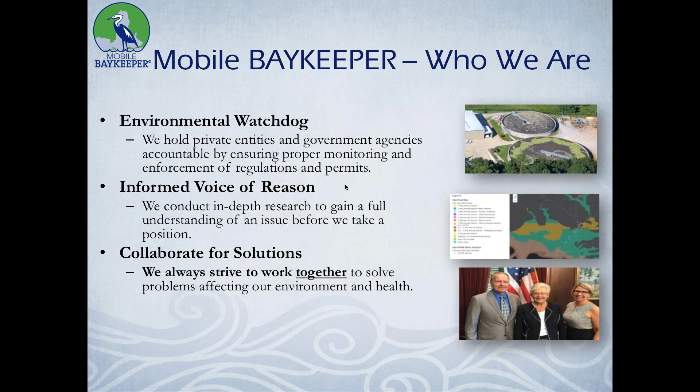We work really hard to be an informed voice of reason. So before we take a stance on an issue, before we point a finger from this environmental watchdog stance, we're doing in-depth research to get a full understanding of the issue. And then we always try to collaborate for solutions. So that means that our first step is not to file a lawsuit. In fact, that's our very last step. In case there's no other recourse we can take, we always want to find a way to work together with a group, an organization, business, individual to fix a problem if we can.

And we do three major things here. We do a lot of education and engagement. That's the fun part of the work. We get to raise awareness about key issues and educate adults and students, and go out and do litter cleanups, apple snail roundups. We have a program called SWAMP, which is a strategic watershed awareness and monitoring program. That's kind of our number one in terms of reach educational program. We work with a bunch of high schools around the area, Vigor, LeFlore, Citronelle, Murphy. We've previously worked with Fairhope, with Alma Bryant, and some of those are newer. So if you guys are grads from one of those schools, you're like, well, I didn't get to do that. We're sorry, but maybe if you have some younger siblings, they'll get an opportunity.

We want people to have jobs, but we want it done in a way that also protects the Gulf Coast and doesn't sacrifice our future and our natural resources for short-term growth. We want to see it done responsibly. So that's kind of what we do. I'm going to talk through a couple slides about responsible, or in this case, irresponsible growth.

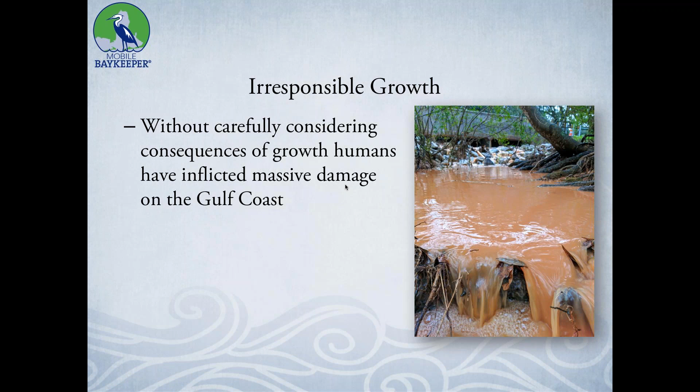Without thinking about what the consequences were over a long period of time, we've inflicted a lot of damage on the Gulf Coast. In the US, over the last several hundred years, we've lost 104 million acres of wetlands, and that's like 60 acres an hour for 200 years, which blew my mind when I figured that out. Of course, the majority of that was early on, a whole lot less since the 1970s and the Clean Water Act, but it still tells you this vast amount of natural resources that have been sacrificed to let our communities grow.

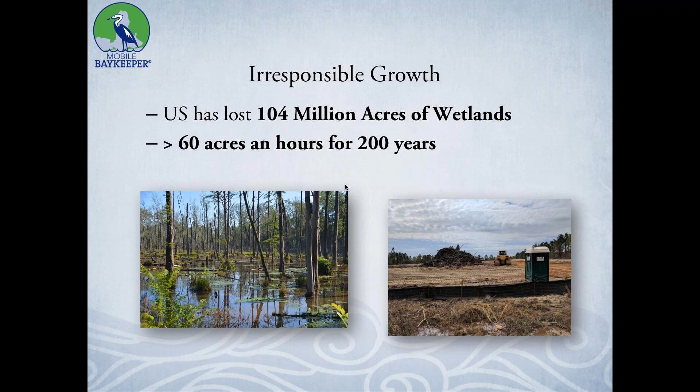And down here, I've got a picture. This is actually locally sourced. If you look one way across this road, the picture on the left is what you see. Then they got this wetland fill permit to build this small industrial facility on the south side of the road. If you just turn around 180 degrees, right behind you is the picture on the right-hand side of the screen. It used to look basically exactly like this wetland, and now it's been filled in. Now it's a nice flat spot right for development.

And I'll talk a little bit about why wetlands are important too. Zooming in, and this is kind of the same deal. Since 1955, the Mobile Bay area has lost 50,000 acres of wetlands. That's about 12 acres a day. And again, the majority of that was early on, but it still tells you how much natural resource has been lost.

And y'all probably know a lot of this, but wetlands are vitally important for our environment. They protect against flooding and storm surge. When there's pollution from different things like sewage spills or stormwater runoff from cars with oil, all kinds of things, those wetlands act like natural kidneys. They filter out the pollution, they absorb it into those soils, and bacteria, microorganisms, and plants are able to take it up and keep it from just going straight out into the environment. And it's released more slowly in a way that animals and fish and all that can handle a lot better than if it just runs straight off.

So wetlands are really important for a whole lot of reasons, both economic, like we don't want our neighborhoods and businesses to flood or get devastated by storm surge, and those wetlands can hold that water, but also environmental.

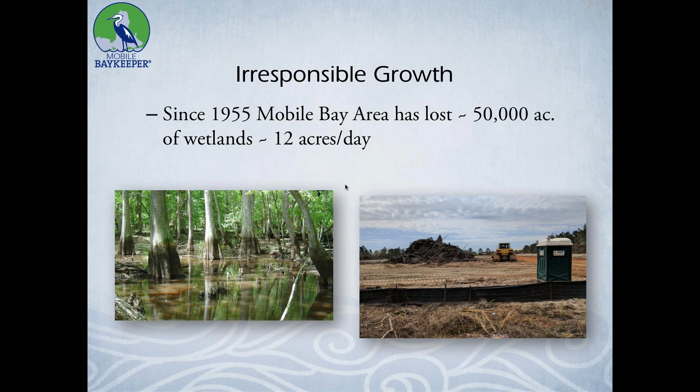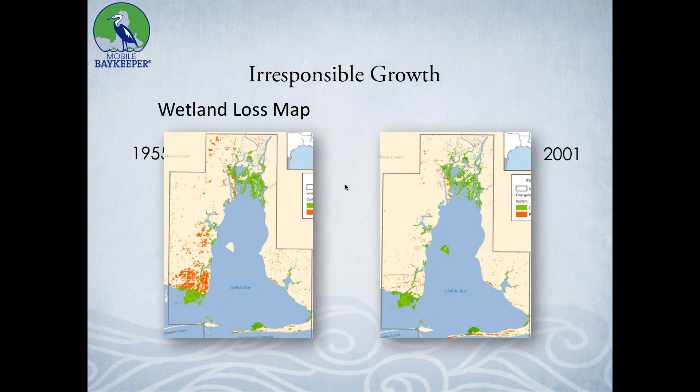But you can just see, I think the green is emergent wetlands, which means wetlands that are a little bit more coming out of the water, a little bit more like down on the marshes and the bays and the rivers. And then the red, I think, is forested wetlands. You can see the red especially taking a huge hit. You can just see all around, Cade and Grand Bay, Theodore, and around Mobile, just tons of forested wetlands being eaten up for strip malls and Dollar Generals and houses and everything else.

You look at the potential for some of these Baldwin County cities to be the fastest growing city over the next 20 plus years, and move to being the fourth largest county in the state. So there's this huge, almost 120,000 person increase that they're expecting in 20 years in Baldwin County. And you see this, if you're over here, or if you come over here much, you see this growth going on just unabated.

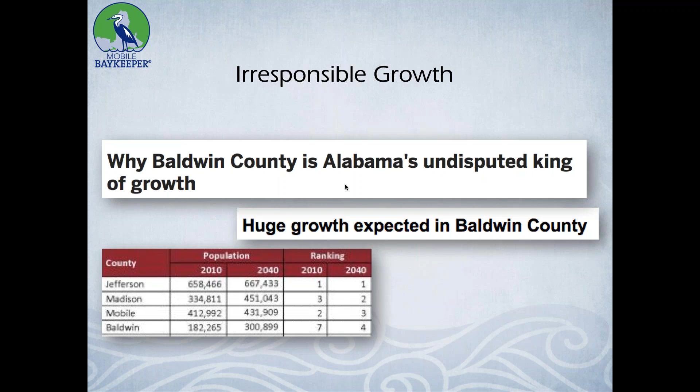It's like a Wild West. And again, we're not anti-growth, it's a matter of doing it right. This is the important piece. But usually when there's things going on really, really fast, there's a little bit of sloppy work done.

So what is stormwater? Stormwater runoff is all the rainwater that flows off the ground into receiving waters, lakes, streams, creeks, bays, wetlands. A lot of that water goes down into the soil, especially where you've got grass or wetlands, the rainwater can infiltrate. But where you have impervious surfaces, like driveways, roofs, parking lots, sidewalks, and streets, that water can't soak in, it's forced straight off into the nearest storm drain. Storm drains don't go to the wastewater treatment plant, they go straight to the closest stream, river, bay, or lake through a concrete pipe. Wastewater is treated, stormwater is not cleaned.

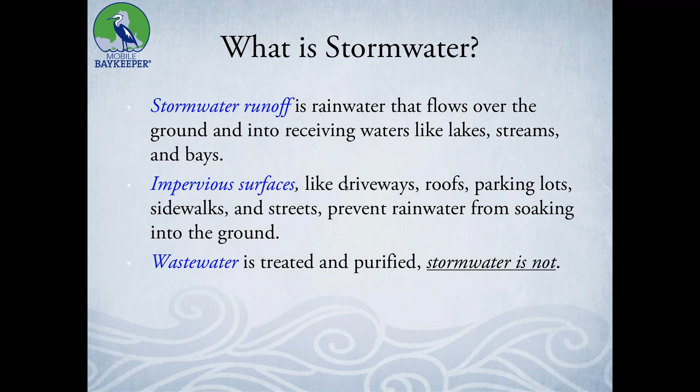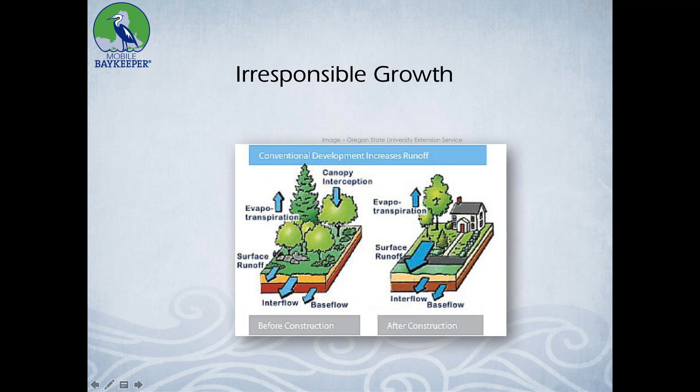So you can see this before and after. You've got a natural area, you get some rainwater, it goes down into the ground, a little bit might flow off into the closest lake and stream. It seeps from the ground and slowly works its way over into the rivers and creeks. You put down a house, roadway, and sidewalk, and a fair amount of it doesn't go down into the ground anymore. See this bigger arrow here for surface runoff, indicating a whole lot more water is rushing straight off, carrying whatever pollutants it might be carrying, including mud, as well as a lot of heat, which is a whole big deal about temperature pollution. And this is fairly mild compared to what you might see in some really urbanized areas in terms of impervious surface.

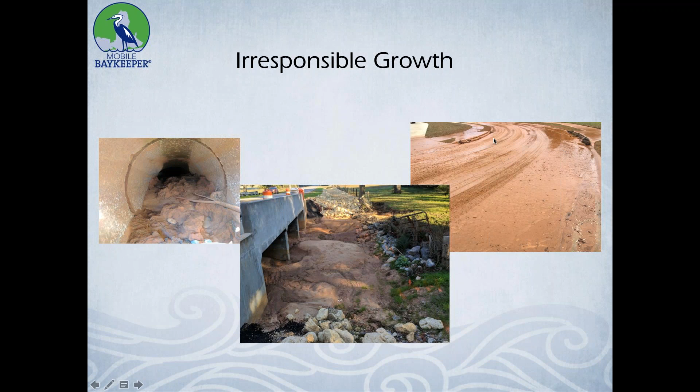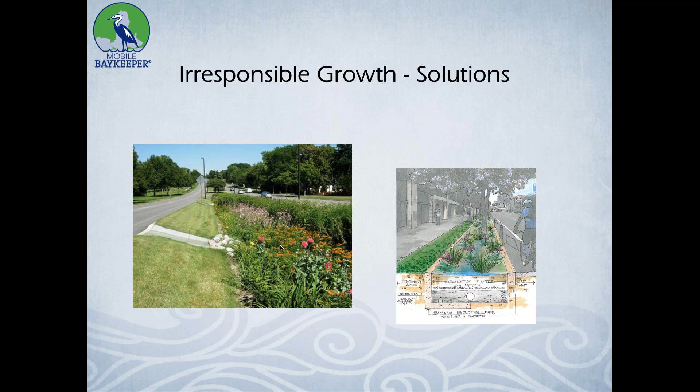So what are some of the solutions? I had a professor at Auburn, Eve Brantley, who would often say vegetation is the answer. Vegetation is often the best way to solve a lot of these problems. You can see here these planters where they've got the stormwater, rather than funneling it straight into a pipe and out into a creek, which is an engineering solution that works to prevent flooding to an extent. These planters have engineered beds under them, so they drain properly. They put gravel down and even have an under drain, a pipe that makes sure the water moves during a catastrophic amount of rain. Instead of the water going straight into the river carrying heat, oil from the roadway, and everything else, it now filters into this nice bed, which is also beautiful to look at. Your community is more aesthetically pleasing, has less potential for pollution ruining your favorite fishing spot, and it also doesn't flood. So there are some great solutions.

All right, so that was a little bit of an intro as to why this is important, but now let's talk a little bit about this Muddy Water Watch program.

This is basically like a volunteer training we do that gets people educated to know when it's a construction stormwater issue specifically. There's a ton of stormwater issues. They range from urban stormwater, which might be things that run off from parking lots and houses, to plain erosion from high velocity water, but construction stormwater specifically relates to mud and a few other things flowing off construction sites when they don't follow the Clean Water Act.

So we train people to know when that's an issue, how to report it, how to deal with it. I've got a bunch of slides here, so I'm going to fast forward through a few of them and get a little in depth. I don't want to kill y'all and put y'all to sleep, so if you see one that's really interesting and I say that one's not too important, you can yell out and I'll make sure I actually talk about it.

The state agency that deals with this, ADEM, the Department of Environmental Management in Alabama, doesn't have a ton of resources to deal with it. They've got pretty much one person in Mobile County and one person in Baldwin County that does these construction stormwater inspections. They can mobilize a few more people sometimes, but that's typically how it works.

The cities themselves usually have a person on their staff that kind of does this. Sometimes that person in the smaller cities does like 8 different things - they run the garbage truck, and they're also the mayor and whatever else. But in the bigger cities there's usually somebody specifically to do this - Fairhope and Daphne have somebody, Mobile has several somebodies that deal with this. So there's job opportunities there as well.

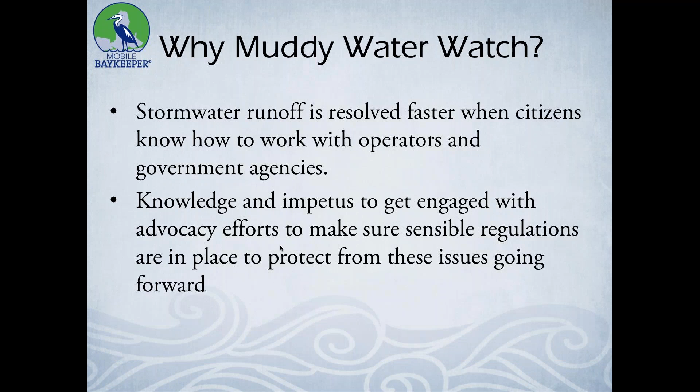To be clear, I have friends that are developers. I know good developers, but some really have a hard time following the law. They come through, they clear cut, they build some condos, and they pocket the profit without doing what they need to do. So that's not everybody - again, that's not everybody, but there are some, and we've seen it prevalently in some cases, and we've worked really hard to get solutions. I'll tell you about a few solutions.

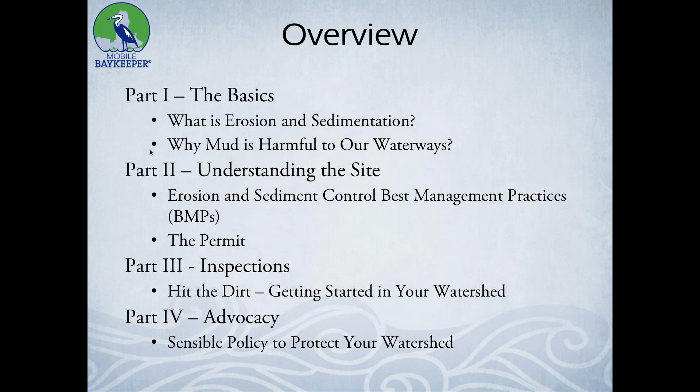Let's talk about some basics. We'll talk about what a construction site looks like, how to do an inspection, how to do advocacy. Why is clean water important? I think you guys know by now - it's everything, right? From being able to drink clean water to being able to play, fish, economy. Clean water impacts pretty much every part of your life.

If you talk to people that have been around Mobile Bay for a long time, they'll tell you about all the grass beds and oysters there used to be, and clear water. But if you go play in the bay today, you won't see many grass beds, you won't see many oysters, and depending on the day, you usually won't see much in the way of clear water. A big chunk of that is muddy water.

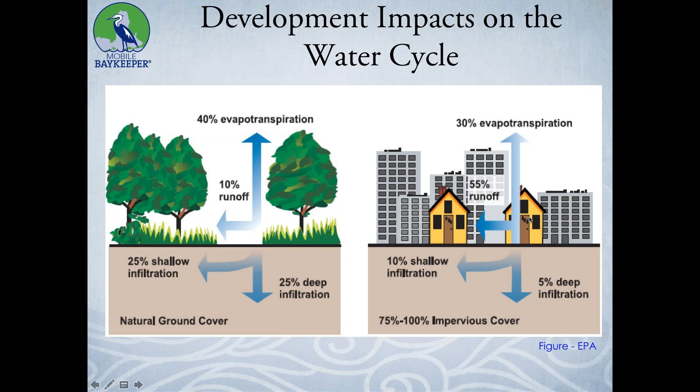So why do we really worry about construction sites? Well, they take off the vegetation, there's a bunch of soil exposed, the flow is concentrated, meaning it's all funneled to a certain spot, and there's increased impervious surface, like roadways.

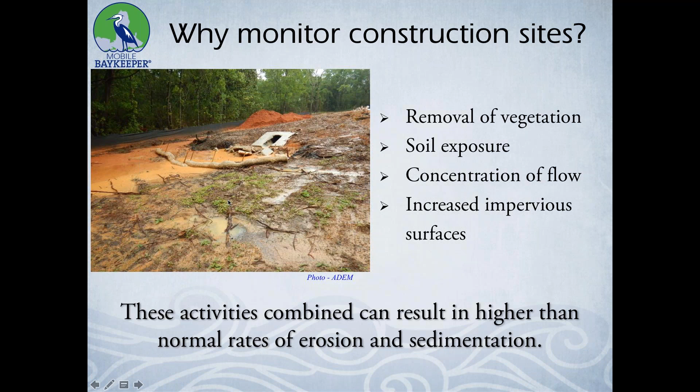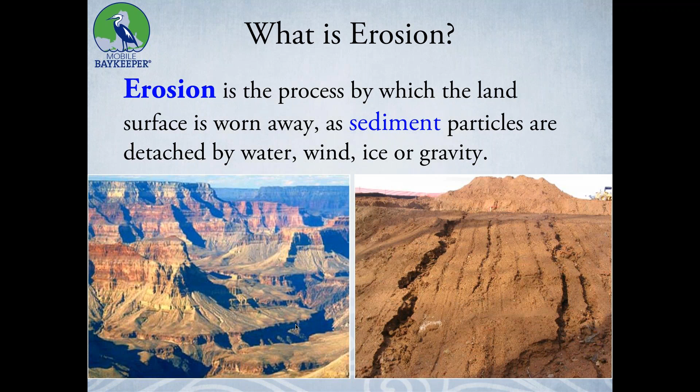Everybody know what erosion is? I won't beat you over the head with it. Land is worn away and sediment particles are detached, right? That's erosion. There's 5 types, which I'm not going to go into in depth because it doesn't make a lot of difference for what we're concerned about, except for one thing: all the types except one are pretty much human caused.

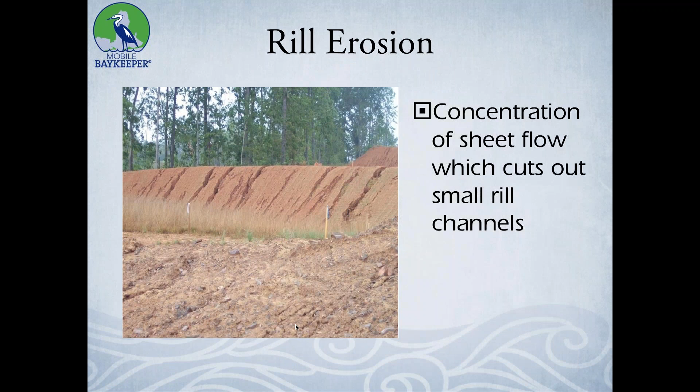This is real erosion, this is how it starts - rill erosion, although it sounds good if we call it real erosion. Gully: when the rills get bigger, they make these established channels called gullies. This is the one that is not usually human caused. We can have stream bank erosion that can be caused just naturally. So there should be some mud in the bay and in the creeks and rivers naturally, but it shouldn't be the amount that we see after these construction sites come through and pillage.

This can be made worse if we throw that stormwater in there full speed coming from the city, because it scours and erodes those stream banks. So we can see that made worse.

If y'all want to see some amazing restoration, if y'all hadn't already been there - obviously tonight is a little bit of a tough time - but those streams in Daphne that they've done, especially the one just south of I-10, they've done some really cool work. Y'all seen those? I see some fist pumping. Y'all get to go, they've gotten to restore some of those sites with the NEP. Well, kudos to y'all, thank you, because those are some impressive sites. I love the team that's worked on that, and y'all are part of that team, so y'all got my love here.

Pretty cool stuff. This is in Fairhope, near Fly Creek.

The one on the right is actually in Mobile County, now that I think back.

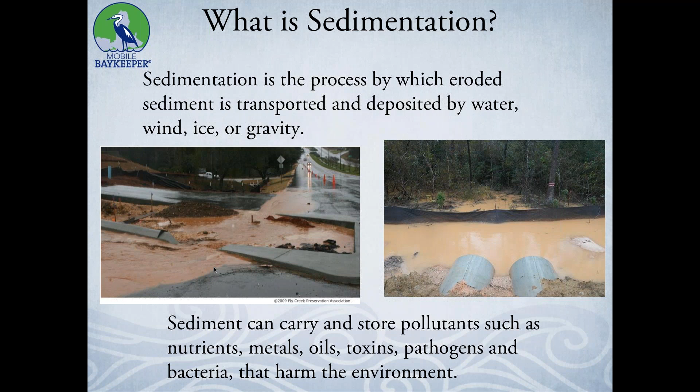Sedimentation is when that mud is actually deposited. So erosion means rip it off the ground, and sedimentation means it's starting to go back into our creeks and streams. And it can carry a whole bunch of other stuff, not just mud. It can carry nutrients, lead to dead zones, metals, oils, bacteria, all kind of bad stuff.

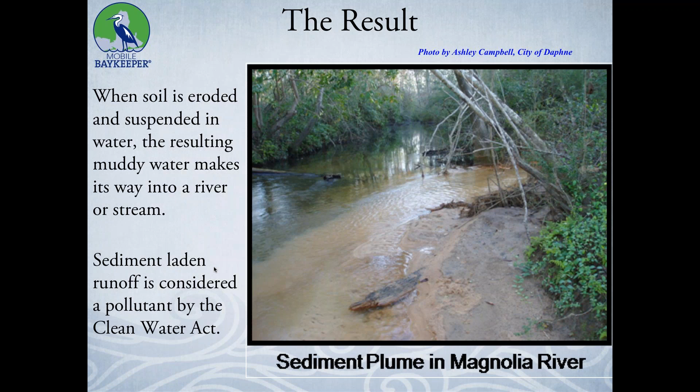You can see this nice plume in the Magnolia River that Ashley Campbell took a photo of. Y'all probably got to meet her if you did some stuff up in Daphne. She's cool.

And just to talk about the impact, because this is the key piece here. It's like, oh, it's just mud, especially in South Alabama, people are like, it's just mud, who cares? I sprayed the water hose on the sand pit as a kid, it's just mud.

Well, again, it blocks sunlight from aquatic plants. Small amounts can irritate fish. Large amounts can actually clog their gills and cause them to suffocate, or also cause them not to be able to breed, which means if you like to fish, it's a big deal, because it can actually cause the fishing to get a lot worse real quick. Grass beds are habitat, and fish need to be able to breed if you want to fish.

It decreases the visibility for fish. A lot of our favorite fish to catch and eat are sight predators, which means they've got to see. And if it's like chocolate milkshake, you can't see very far, and it can smother all their food sources.

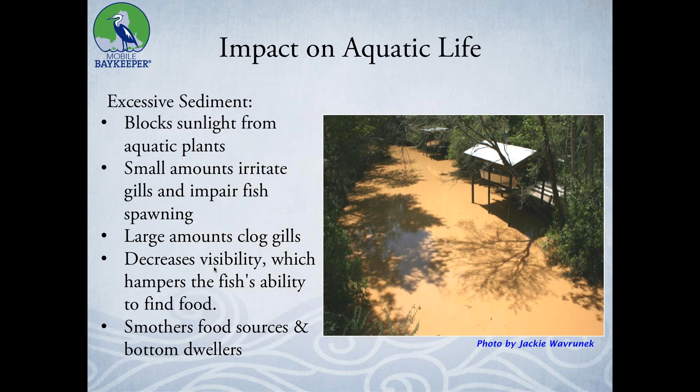Not a good deal if you bought that property thinking, man, I'm putting that boathouse out there, I'll be getting my John boat out, this property's worth X. And then one day you're like, man, I worked really hard for this property, and now I can't put that boathouse out there because the developer upstream completely silted it in. They saved some money, you lost a bunch.

Impacts on humans, right? It can cause property damage. Like I said, if you work for a career and you buy a tract of property on that favorite creek that you loved, and then somebody develops a 500 unit apartment complex upstream, and your bass boat or pontoon boat can't get out anymore, that's a big deal. I'm kind of making light of it, but that's a big deal. Talk about property value.

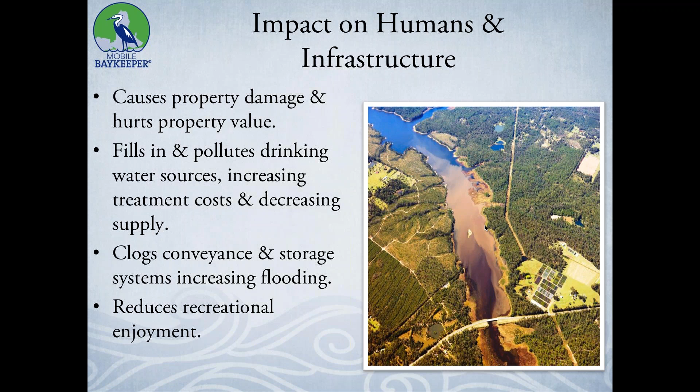You can see before and after, it's a big difference. This is actually upstream, same watershed, downstream of this construction site.

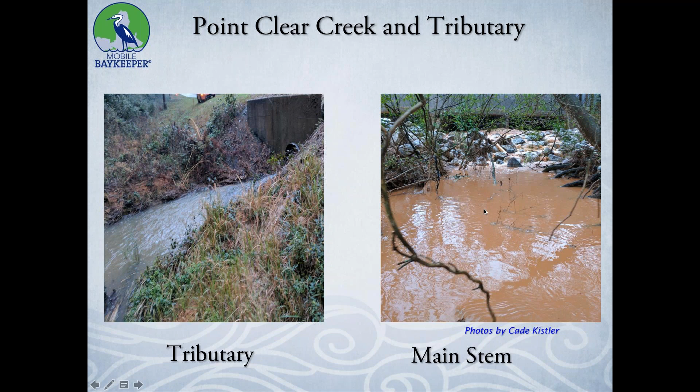I mentioned earlier the NEP study. If y'all want some late night reading, this is another one, to help you get to bed at night if you're having trouble sleeping during the pandemic. You can just read the Alabama Handbook for Erosion Control, Sediment Control, and Stormwater Management, and problem solved, you'll be right to bed. But really and truly, this is like the Bible on erosion control, and there's a lot to learn if you find this interesting, think this might be a career one day you might be interested in. There's some really cool opportunities in this field.

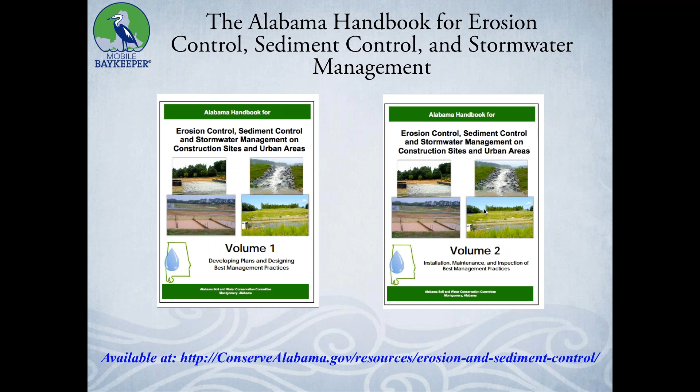So here's the thing with stopping construction stormwater - it's all about best management practices, or BMPs. The key is three things, because usually you only see one, maybe two of these done right.

It's got to be designed properly. You got to have somebody that understands flow, water, and hydrology to look at the site and say, this is where you're going to have problems, this is where you're going to have a chance for erosion, this is where you need to install these BMPs.

Then it's got to be installed properly. That one makes sense, you got to put them in right. If you do it lazy, if you do it cheap - if you've ever installed anything in your life, you've done it lazy or cheap, then you know how that goes.

And then they've got to be maintained. That's the key one we see most of the time not taken care of, because they're busy building houses or Dollar Generals or whatever else. They want to get it done, because the quicker they get it done, the less staff time, which means more profit. So fixing the silt fence or fixing the wattle means you're not making money, essentially.

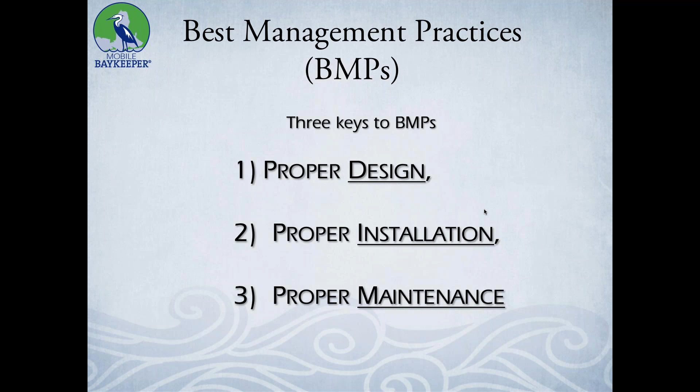Unfortunately for their profit margins, for those irresponsible contractors, the law says you've got to be able to protect the downstream water quality. So this Muddy Water Watch training helps us train folks to enforce that, so we can all have clean water.

And there's two types of BMPs, right? One is to stop the soil from being eroded - stop the dirt from being detached. The other is to actually stop it from flowing downstream.

Number two is the one you see the most, silt fences. If y'all have ever seen a black fence around a construction site, that's number two. It costs a lot of money and works a lot less effectively. Number one is the best, and typically has to do with vegetation. It's a lot easier, but takes a little more thought.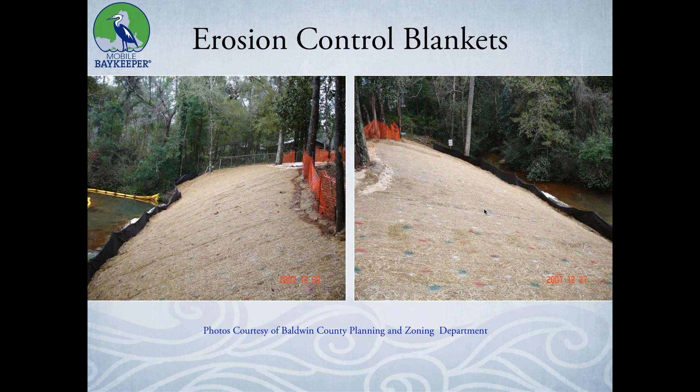Mulch can be used too - you can put down hay, pine straw, different types of mulch. Again, the key here is you're trying to keep the soil from actually being eroded in the first place.

I had this class one time, and we did an equation about the force of 1 inch of rain falling on 1 acre of soil. I don't remember the exact number, but it was like tens of thousands of locomotives. It blew my mind - the force of raindrops hitting the ground is just really, really high. So you want to reduce that force a bit, knock it down, so you don't end up with as much mud moving around your site.

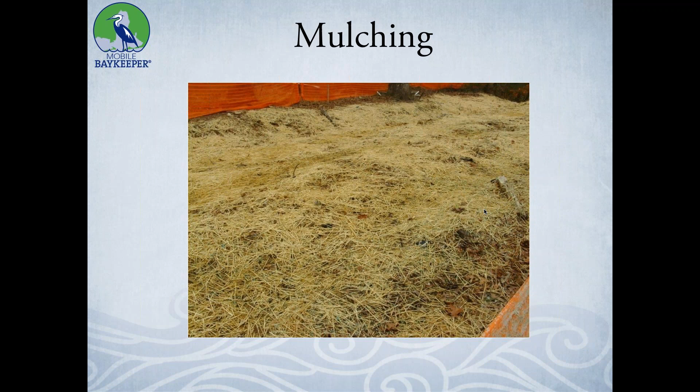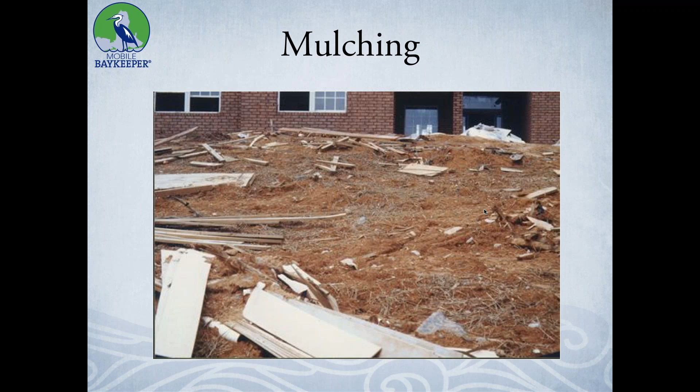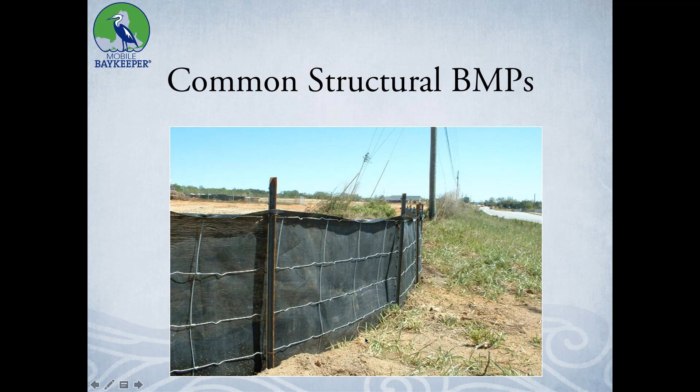Moving on to these structural BMPs, not the vegetated ones. This is a silt fence. Most of y'all have probably seen this at some point, may not have paid it any attention. This is a pretty good one, right? You can see the big steel T-bars, the pig wire. It's set to stay, and you can see at the bottom it's been trenched down to the ground, because if you ever play with water, you know that if you just set it on the ground, the water is going to go right under it.

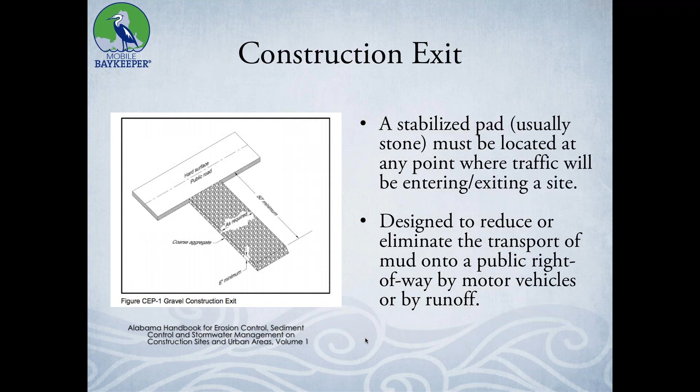Construction exit is one thing that's required. When you go in and out of a construction site, it should make you spill your coffee. That's how you know there's enough rock or stone at the exit entrance, and that's to knock mud off the tires of the construction trucks and dump trucks coming in and out.

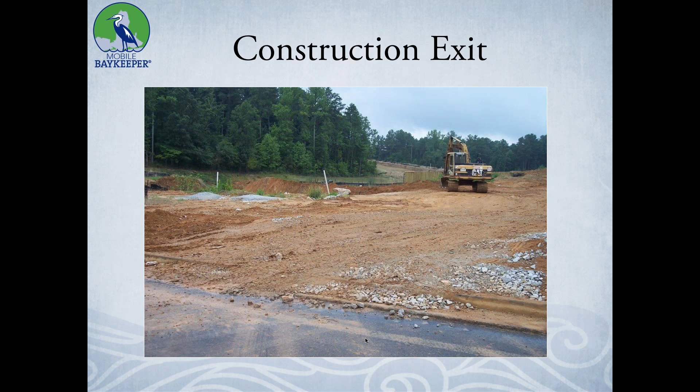Sometimes you see pretty good ones. That's an example of a pretty good one. Sometimes you see ones that stand to use some improvement, right? I don't think that's going to spill my coffee. Furthermore, it's already covered up in mud, and it's not going to knock anything off trucks coming in and out of that site, and they're going to put mud in the roadway.

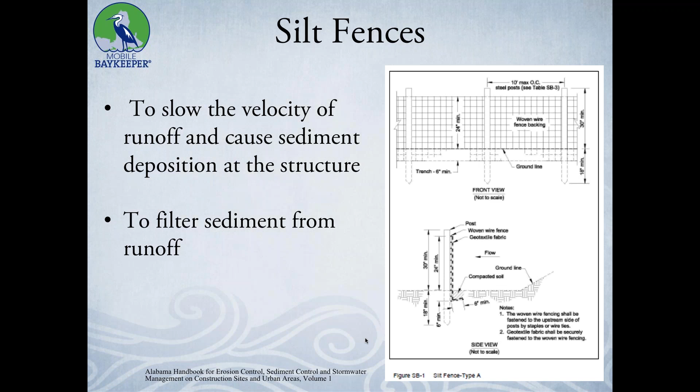So silt fence, I mentioned earlier, is the most common thing. It's supposed to slow down water coming off the site and cause the sediment to drop out and filter the sediment out. Again, that's a good one.

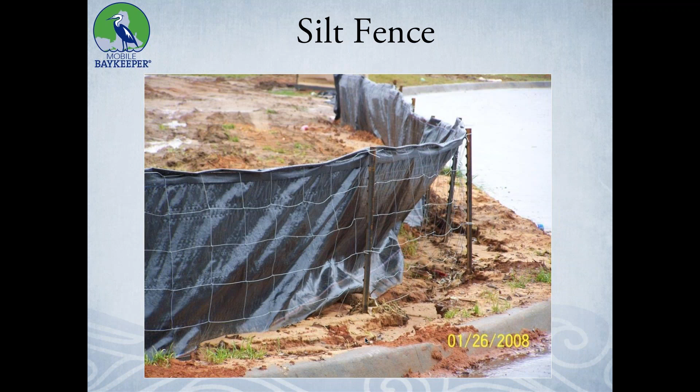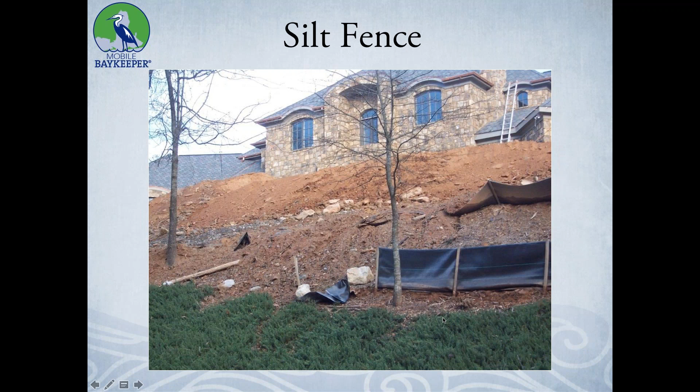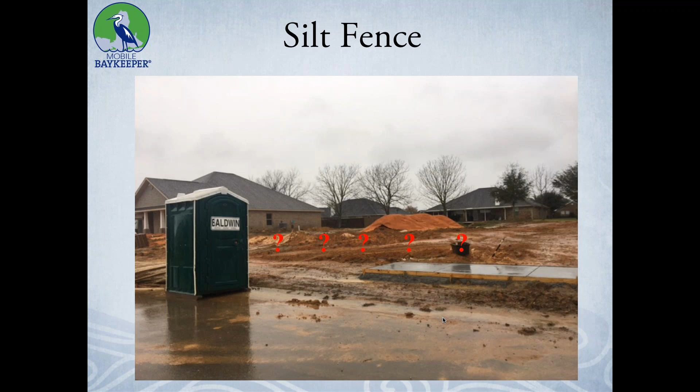And in this picture, the silt fence is also not doing a very good job. Of course, it's right there - that's the silt fence there - and it won't work because invisible silt fences are known commonly to fail. My wife says I'm corny. I don't know what the deal is with that, but I'm sure y'all won't think so.

All right, inlet protection. This little green and gray circle is a stormwater inlet. One day when this neighborhood is finished, it'll be the drain in the middle of the driveway or the roadway that water flows into to go into the pipes. But you don't want it filling up with mud before your construction is done, for a couple of reasons. One, the pipes are probably already connected - you do that first - and so it's going to take that mud and flow it off the site.

Two, if you're going to move in there one day, you want it kept protected too, because you don't want your stormwater pipes to be backed up the day you move into this nice shiny new neighborhood that looks clean, but under the surface it's got stormwater pipes full of mud - because then it's going to flood from day one. So this is good inlet protection. They put these little synthetic covers over them, keeps all the mud out, and then when you're done with construction, you pull them off, and voila, you have a nice stormwater drain.

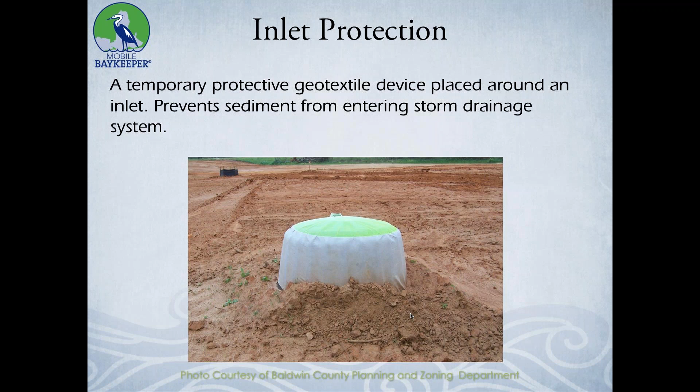This is not good inlet protection, right? All the mud's flowing straight into there, it's going out the pipes. So you got mud going to the creek, but you're also filling it up for the neighborhood before they even move in. These people don't know this because, as a home buyer - if you've ever been one, or think you will be - it's typically not the kind of thing you're looking for. You're not saying, let me see the pictures from 10 years ago when you built this neighborhood, did you have proper inlet protection? Right, there it is.

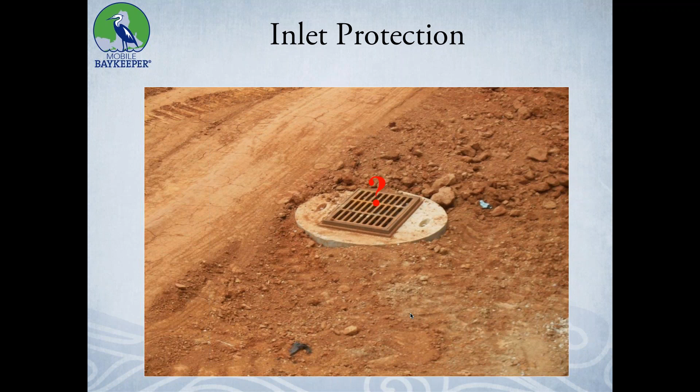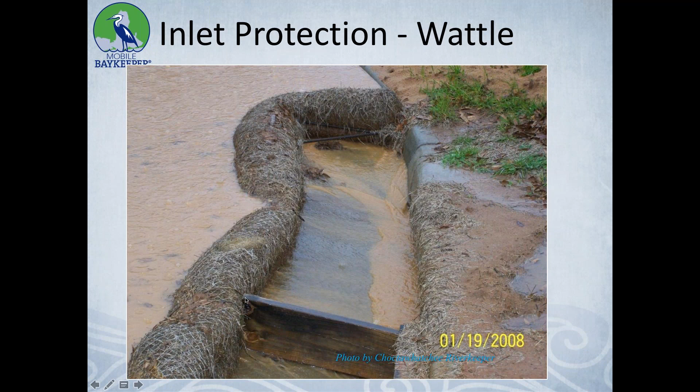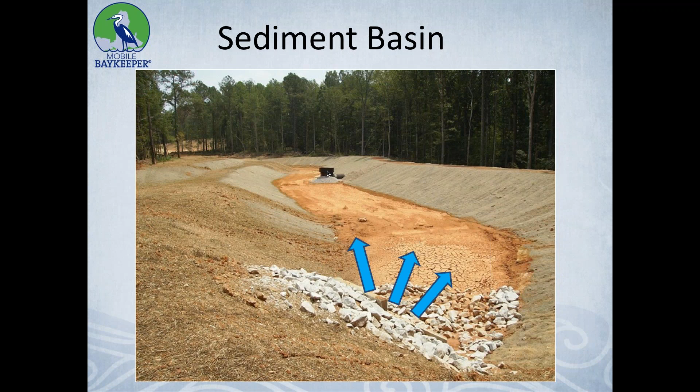And the last step in the train is typically a sediment basin. Water flows in here and it's supposed to make the sediment drop out. This is what we call a riser pipe. Until the water gets to a certain height, it can't leave this pond. So the water comes in, gets slowed down in the pond, mud drops out, and then the water flows out the riser pipe, so just the cleanest top-level water is flowing out of that pipe. This one's not doing a very good job, but again, this is more a problem of upstream in this neighborhood - they didn't do enough - than the sediment basin itself not doing a good job, although you can tell this is pretty much a disaster.

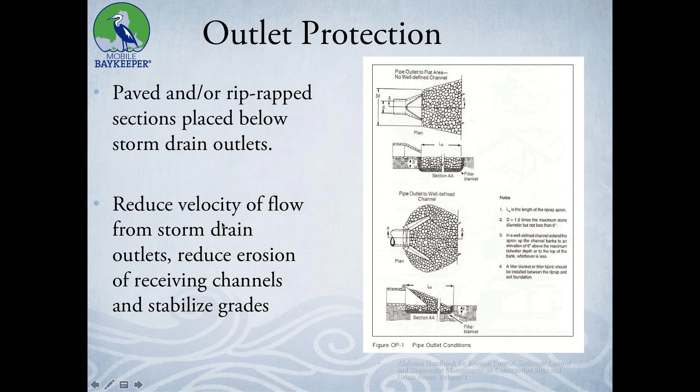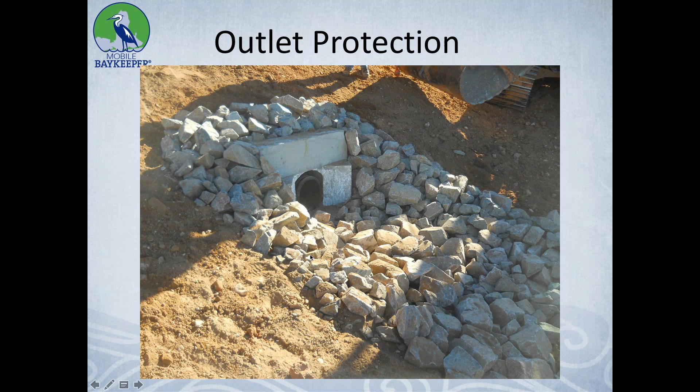All right, so here's your test. This is a treatment train here, a whole bunch of these things we just talked about. Does anybody want to come off mute and take a swing at naming one thing you see going on here that's a good thing?

Well, they got some - I forgot what they were called - the silt, not main silt fences, but these are wattles. Yeah, is that what you're talking about? Yeah, those are good, those wattles. Yeah, slowing down the water. Absolutely, exactly.

All right, so we also see they've got a bunch of vegetative cover. This is number one again - this is going to keep there from being much mud to flow off the site in the first place. They've got some mulch down and some grass down. Am I saying that too? Yeah, I was going to answer with the mulch because that's what I thought it was.

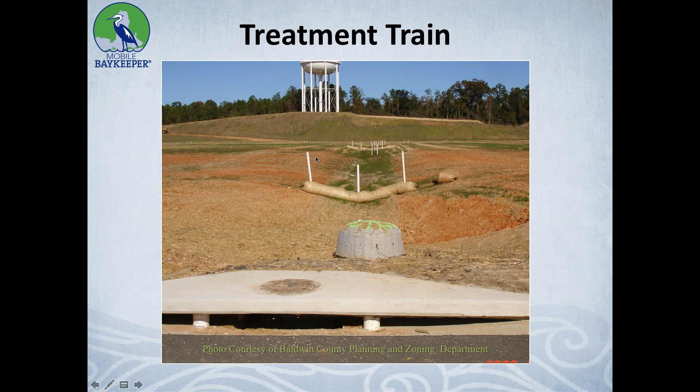Exactly, and that's a big deal because that makes everything else - these wattles, silt fences, and inlet protection - not have to work nearly as hard and fail nearly as quickly, because you don't have as much mud being moved around. It costs a lot of money to mulch a site, but if you're stopping the mud, then you're doing enough. So you've got some mulch and grass down, then the wattles knock a little bit more down, and moving back upstream - you stabilize this slope, got it mulched, got these wattles - so by the time it gets to this inlet, it's not having to block out literal tons of mud, it's just blocking out a little bit.

And I think I've said twice in this presentation, literal tons of mud. I don't know if y'all have noticed in society lately, but everybody says 'literally' when they don't mean literally, but I do, because I talked about equations in this class we had to do one time. One of them was like, how much mud is lost by an unprotected site - if you cleared an acre of dirt and got 1 inch of rain, it's like 1 ton of mud, depending on the soil, that will be lost from that acre. So we're talking thousands of pounds of mud flowing to creeks, streams, rivers, and eventually the bay and the Gulf when you don't do this right, when you do it improperly.

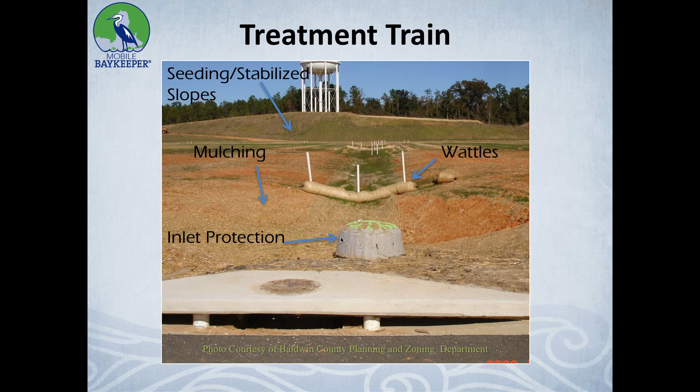I'm not going to talk in a lot of detail about the permit, except to say each one of these construction sites is bigger than an acre. If you're digging a garden in your yard, it's okay, but if each construction site is larger than an acre, they have a permit from the state that says you must knock the mud down before it leaves your site.

Essentially, they have this thing called an NTU. It's how you measure turbidity, muddiness of water, and you can only increase it by a certain amount. Like if the creek coming next to your site is running at 40 NTU, you can only increase it 50. So if it's 95 when it leaves your construction site, you're technically breaking the law. If it's like some of these pictures I've shown, 1,000 plus, then yeah, you're absolutely breaking the law.

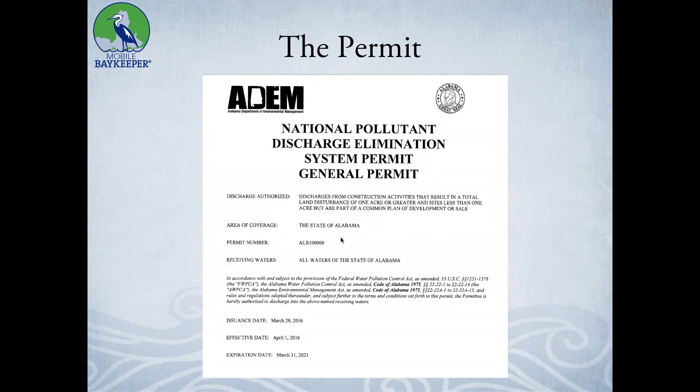This is the kind of situation where we need citizens to take pictures and be able to say, hey, this silt fence is down, hey, there's no mulch, hey, this mud is coming off this site and the creek's clear upstream. Then we'll take that and work with ADEM to get it right, or work with the contractor when we can. I've got a picture of that too. There's a bunch of detail about that. Y'all don't necessarily need to know all that.

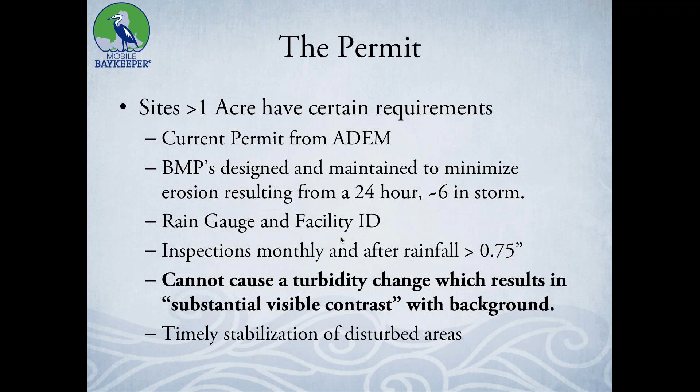If you want to get interested in permits, there are QCI classes you can take. Thompson Engineering would probably give a discount for nonprofit kind of stuff. They've given us a discount before, and it's an interesting class if you want to geek out on this with me.

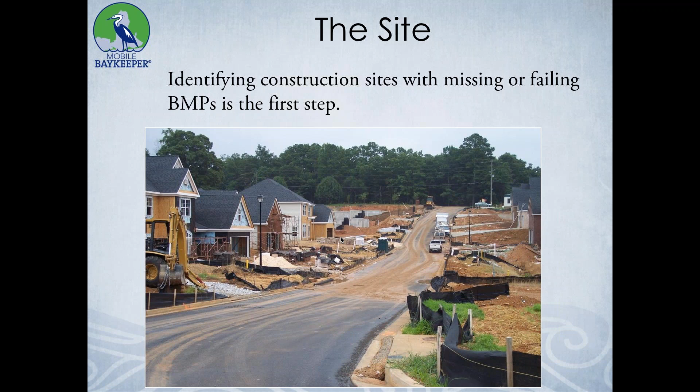So what do you do if you see one of these sites and you're like, you know, I'm curious if they're doing it near your neighborhood, behind the mall, next to your house, whatever. The first thing is you see something that looks like there's some failing BMPs, or you see this creek that's running muddy.

You want to try to get as many details as you can. I can't say how many of these we get where it's like, well, there's some mud, it's running into a creek, you know that Dollar General in West Mobile? I'm like, no ma'am, I do not. What's it near? What road's it on? Yeah, you know, it's real.

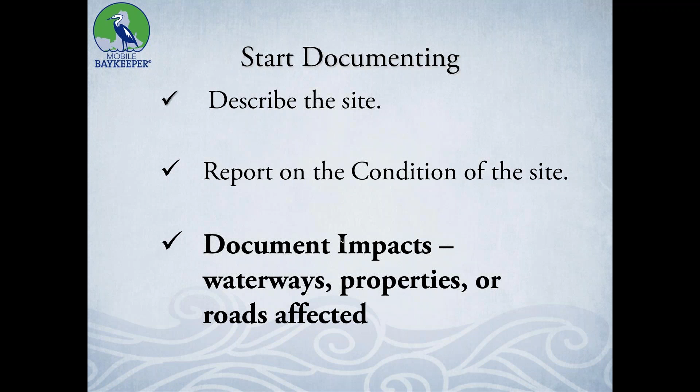And sometimes, you know, we figure all this out and it's a disaster, it's a big problem. Other times, it's somebody just don't like their neighbor, you know what I mean? So pictures and detail help us a lot, and help the state agency a lot, or the city if you're reporting to them. So describe the site and then document any impacts, that's the big deal.

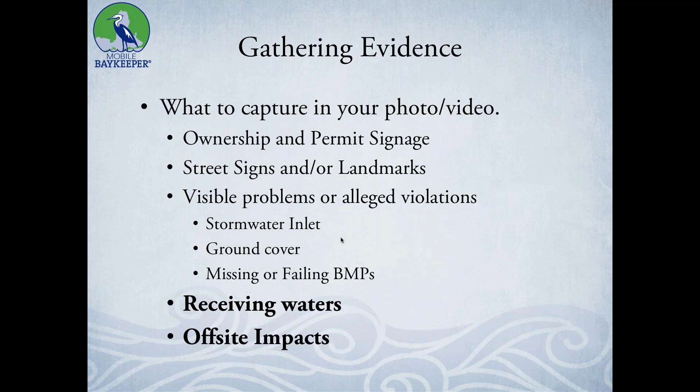So what do you want to get? Pictures of street signs or landmarks, any permit signage or ownership signage, and any problems, like all the stuff we just talked about. The most important thing is what I call receiving waters - that means the creek that's catching all this mud. If there's a creek right nearby and it's running full muddy, you can see the mud coming off. That's the key detail.

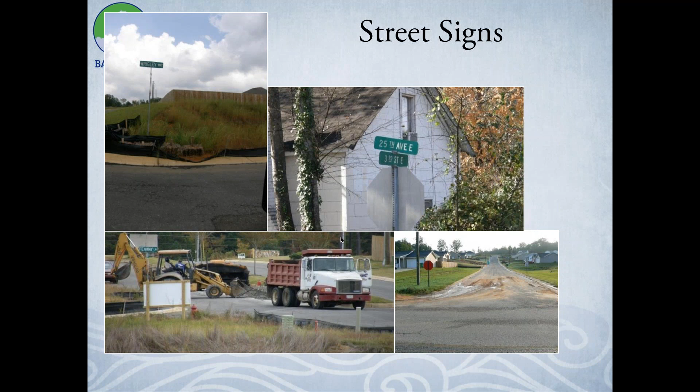All these type of things show who's running the site and who's permitted, and they help make it easier to figure out who you need to contact if you want to work with them to fix the problem, as well as if you contact the state to say who's responsible. Street signs, that kind of thing - if you say, well, it's in this 400 unit neighborhood and there's a problem, it's like, where? So having signs of intersections, that kind of thing, make it a lot easier.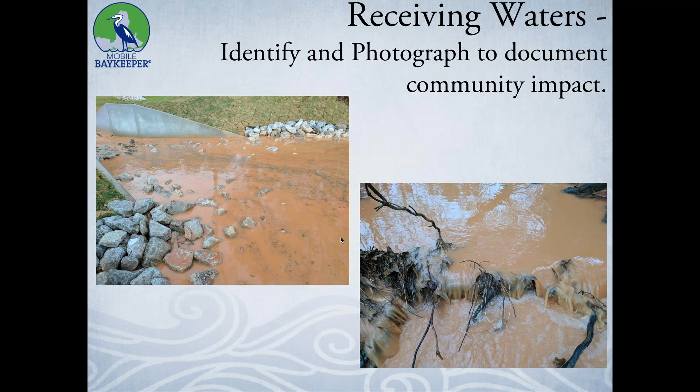Pictures of the issues, y'all can see some of the things we talked about in all these pictures. And then, like I said, any impacts to the community, into the creek - this is Point Clear Creek - all those type of things, those are the big deal.

And then you can report it to the contractor. You can call and say, hey, I don't know if you know about this, maybe your guys haven't had a chance to go out there, but there's a bunch of mud running to such and such creek near this site, and it says you're the one running it, and I'm just trying to give you a heads up because it looks like it's a problem.

And you can also report it to the state or the city that does enforcement. We use Water Rangers a lot now, and there's a web page for Water Rangers, as well as an app, and you can report pollution, and I'll get a report in the office, and we'll go send somebody on the patrol team to take a look and check it out.

And then we can follow up, so you'll get a little dialogue that says, we're investigating it, here's what we found, here's some photos, here's a report, and figure out what actually happens.

And we try to recognize contractors who are doing right. Like this was Coumanis Allen, they had some problems at a site. One of our AmeriCorps members saw it, reported it, gave them a call, and they actually voluntarily went above and beyond to fix the problem, which was pretty cool. So we posted on Facebook.

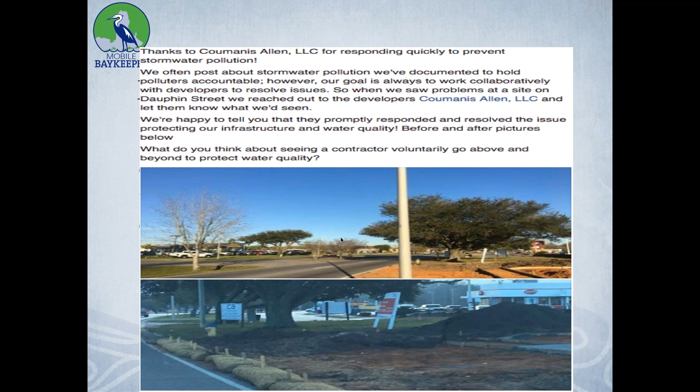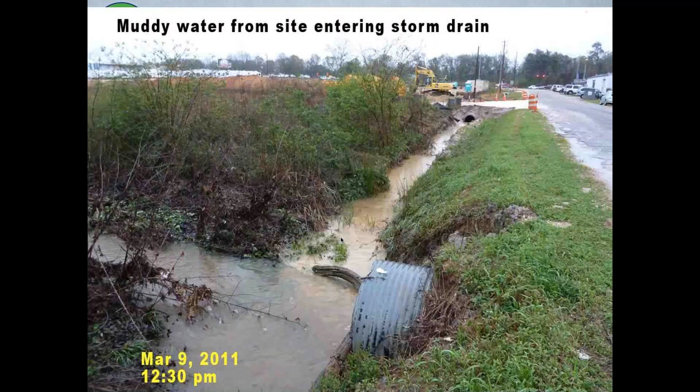Here's some pictures of Muddy Water Watch in action. This is some muddy water leaving a site, flowing in. Silt fence is never meant to go in a stormwater ditch or in a creek. If you ever see a silt fence in a stormwater ditch or in a creek, you know that contractor is just jerry rigging it or doesn't know what they're doing. I don't know, but that's not right.

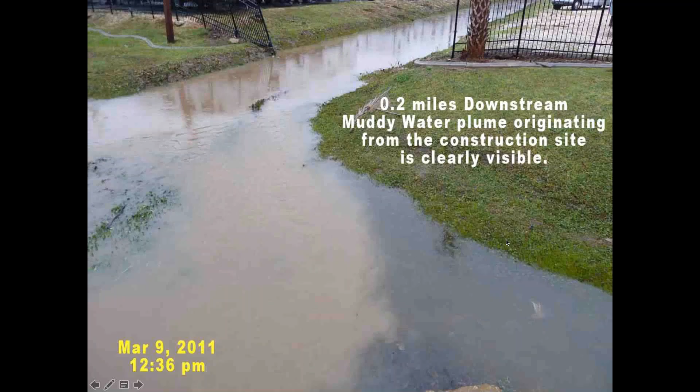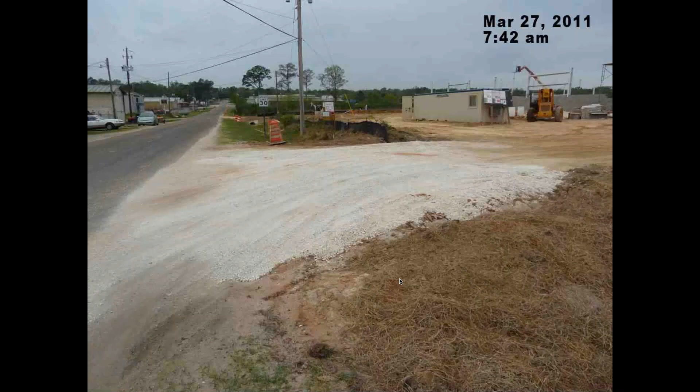This is 0.2 miles downstream, and after a report and a conversation, this is what it looked like. They still got the silt fence there, which isn't causing any problem necessarily, just that's not how it works. But they fixed a lot of these problems. They got a construction entrance. I've got another one, but I'm not going to go into this because I think we're already pushing our time.

Advocacy - we do a lot. We inspect sites, we lobby for enforcement. We just saw one of these sites, the subject of about 15 pictures in here that was a complete disaster. It just got a big fine from the state after like 2 years of work on our end, and hundreds of complaints from local citizens who were just aghast at what was going on.

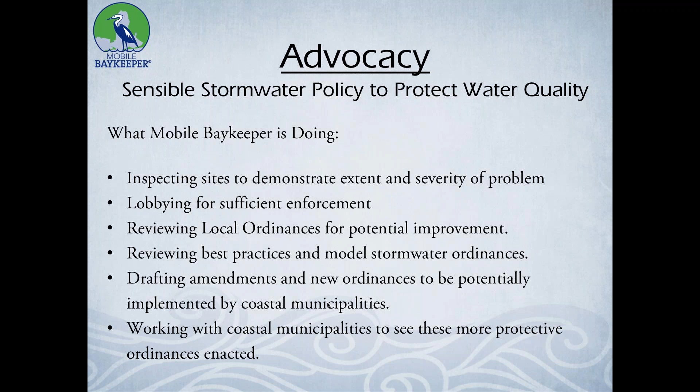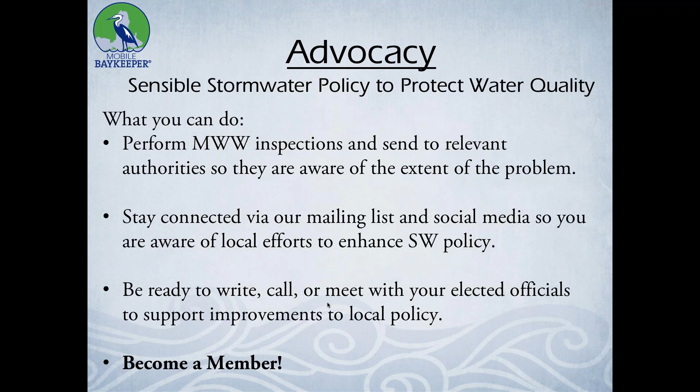Talking to your elected officials about why this is a big deal, staying connected, performing these inspections, and definitely being ready to write or call or meet with elected officials to tell them that this is a big deal. It's not just mud - it actually causes major impacts to the bay.

A lot of thanks to some great funders that have helped make this work possible. So I will shut up and answer any questions, and hopefully I haven't killed y'all or bored y'all too much talking about mud.

Yeah, that was great, Cade. We have some questions, and I'm going to call on Amber because she asked about the history of it. So if you want to go ahead and ask your question, Amber. Should I repeat the first question I asked? The one I just sent you. Yeah, I know you have a couple in there.

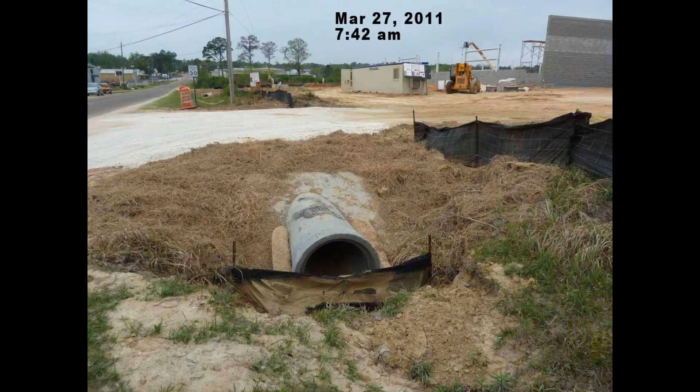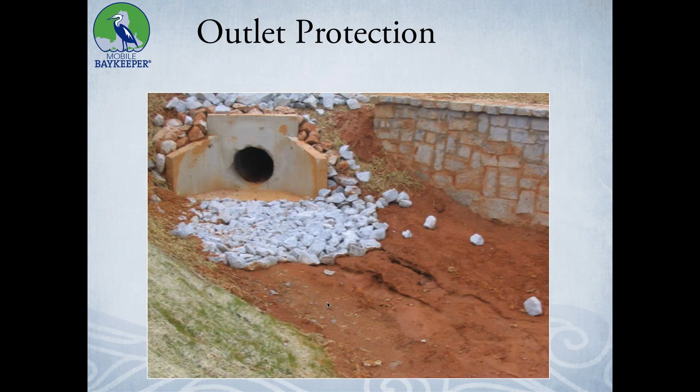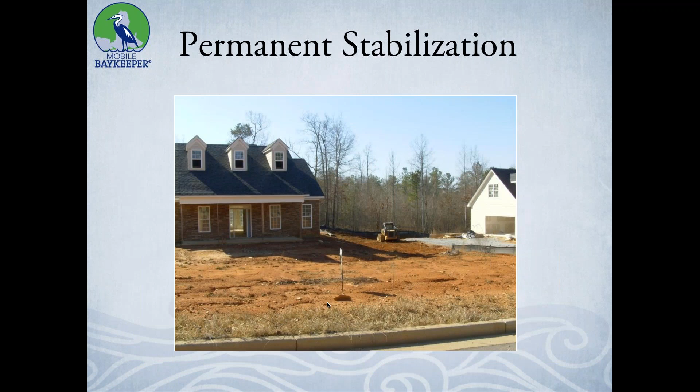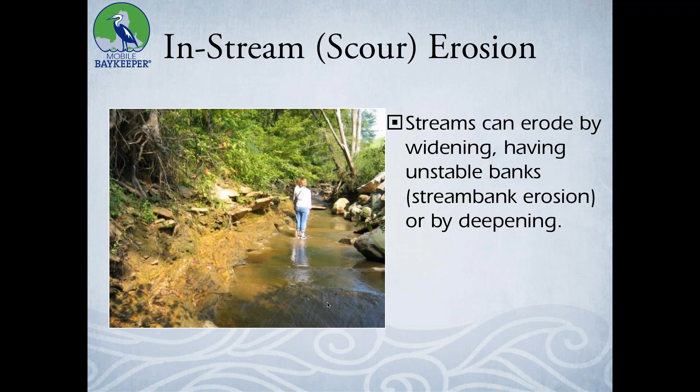Yes, and it's probably making everybody sick going through the slides so fast, but we have seen improvement, absolutely. I don't have a satellite picture of the bay from recently, although I'm sure we could get one that would look better than that. And of course, it depends - when you have major flooding like we did during the Mardi Gras period, you're going to have a much muddier bay than during a drought. The bay can get really, really clear during major droughts.

But the regulations, the Clean Water Act, have made huge improvements. Recently we've seen some of those regulations going the wrong way, which is unfortunate and a little disconcerting. But we've seen improvement in the amount of sediment going in. Now it's a matter of tracking down those contractors that still try to get by, because there are so few ADEM inspectors and so much ground to cover, especially in Baldwin County, and trying to figure out how to make sure they feel incentivized to do the right thing too.

And so it has improved. Short answer, it's not where it needs to be to see major improvements in the grass beds and the oysters in the bay. We've still got to keep slowing down the amount of turbidity, the amount of mud.